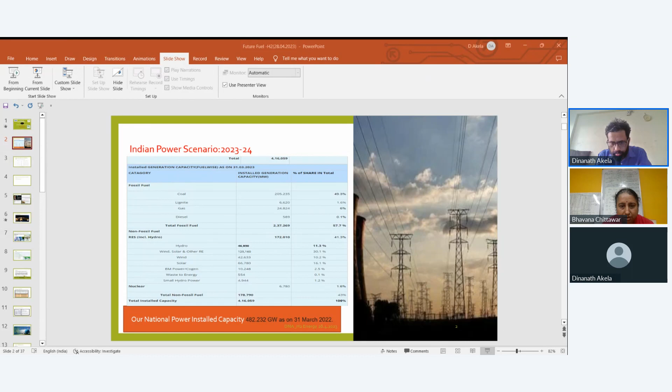Yes, Bhavna ma'am, now it is showing the energy mix opportunity. Yeah, we can see that slide. Just one and two slides, just I want to change. So the slide is changing, ma'am. No, slide is not changing. Why don't you take it in presentation mode? Okay. So I think in full screen it is not going to work. No, you can take it in presentation mode. Yeah, now we can see, yeah now the slides are changing. Okay, yeah.

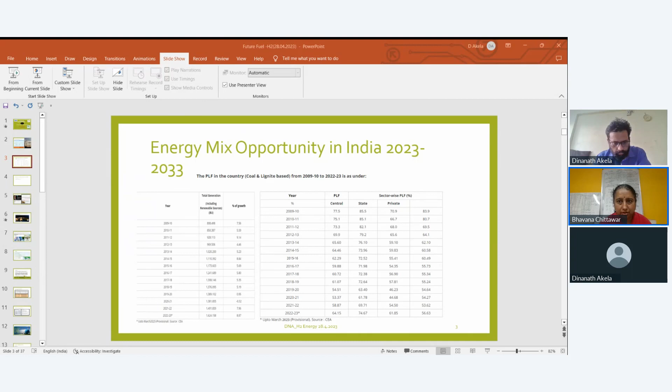The third one, why hydrogen is a lucrative solution. Is it okay, ma'am? What we can see is Indian power scenario 23-24. No ma'am. Yes, please pardon all the participants. Please confirm, now it is changing, and now we are seeing energy mix opportunity. Okay, next one is... it is not changing ma'am, no it's not changing. Okay so can I do one thing? I can now give, it is now Indian power scenario. Okay so what I will do, I'm just going to change it manually. So now it is, yeah, it is visible, yes it is visible, now it is changing, yeah it is changing. Okay, so we can manage it like this. Okay yeah okay. Yeah it is changing now.

So, all participants, right now I'm going to talk to you about the total installed capacity. Right now, as per data from the Central Electricity Authority, we have reached 416 gigawatt. From this data, you can see that coal still has 49%. But I'll give you details from just one decade before: we were in a position where 65 to 70% of generation came from thermal. Now we have come down to coal being just 49.3%. In the coming decade, I forecast that the load coming from fossil fuel will also be reduced significantly, and the other part about renewable energies like solar, wind, the green hydrogen concept, and other sources will grow.

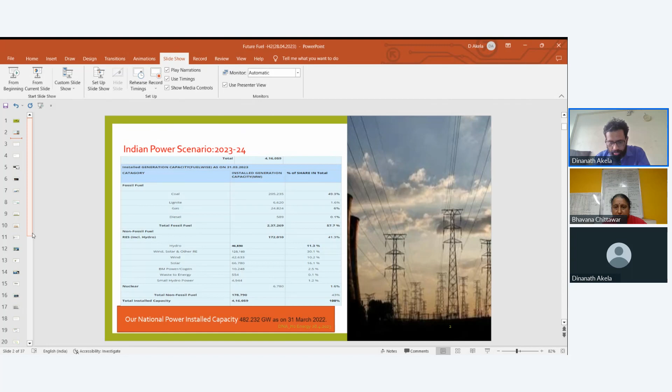So what I'm going to conclude from here is that if we are looking forward for the next decade, from 2023 to 2033, in these 10 years, right now it is the best time that renewable energies are going to lead.

This is the same situation as when I compare it to 2009, when I was in engineering college, and at that time solar had just taken birth. At that time many industries and stakeholders were talking about how it is not going to be an alternate solution to thermal, because I remember the unit cost of solar was coming to 13 rupees plus.

But now the situation, in just 10 or 12 years, is that solar is very much competitive with coal in terms of pricing. But due to some other factors, the cost of coal also goes high.

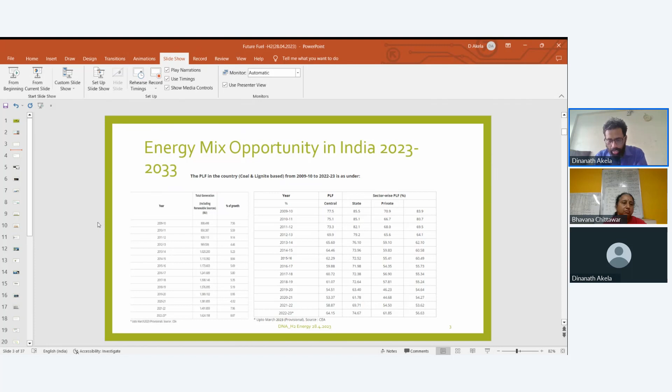In the same way, right now we are in the phase where hydrogen is just going to start its birth. This is the right time where many industries are giving more and more emphasis on R&D. They are setting up their own labs, facilitating things, investing, and coming up with great solutions.

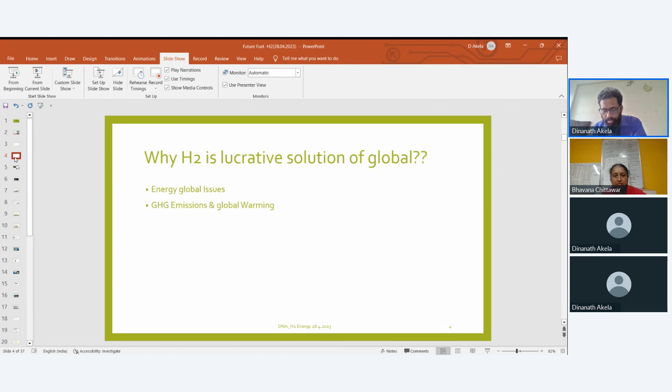So I will share one or two things in this regard. First, I would like to tell you about Reliance - their respected MD Mukesh sir has told about their target of 1-1-1. 1-1-1 means it is very interesting: the thing is about 1 kg of hydrogen would cost $1 within one decade. So he has put this target.

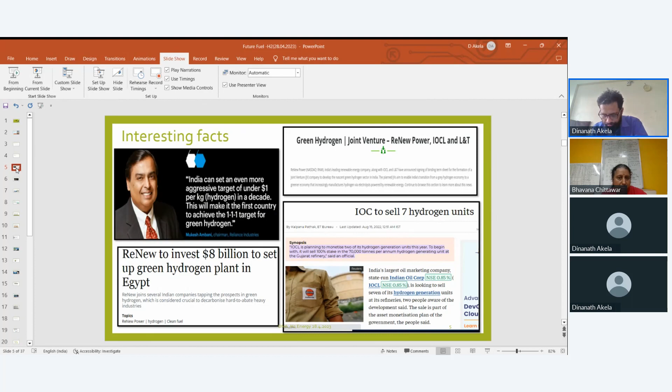Apart from that, other ventures like Renew Power, IOCL are also going to make great investments in this field of hydrogen energy. We also have an update that Germany has started some hydrogen fuel trains. So I want to share a small video showing how our country is moving in the direction of Atmanirbhar Bharat.

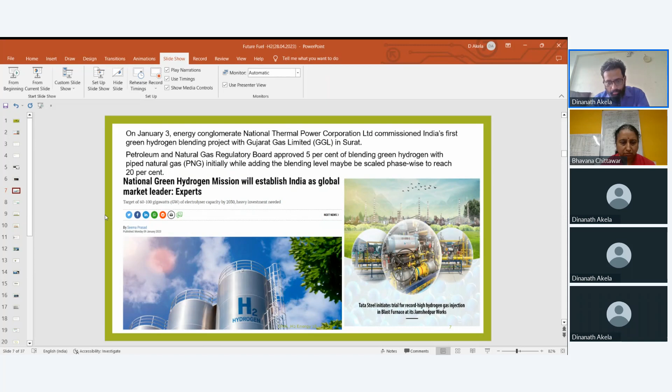Some more examples - right now Gujarat Gas Limited in Surat is doing the blending of hydrogen with natural gases. So this is the right time, and we are hoping that definitely our country will lead in this platform.

But it is not easy - there are so many challenges we have to face right now, like technology development. From now onwards I'm going to share how this firing technology is going to be built up, as we talk about the system of the furnace and the system of the boiler. So I will explain each thing in detail.

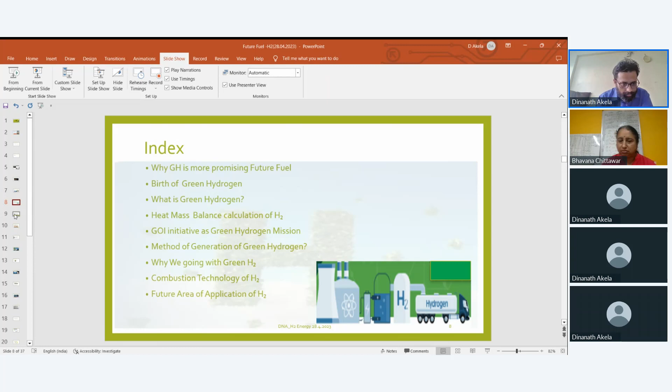First, I will give you the characteristics of these hydrogens. It has a huge GCV value, like 28,922 kilocalories per kg. If we compare with natural gases, we clearly get more than 2.5 times.

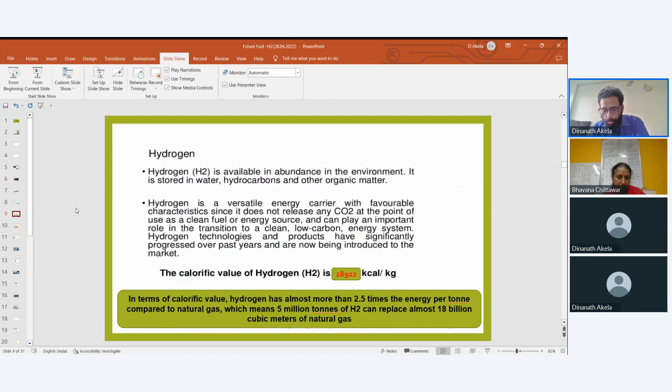Apart from that, let me show you another factor: if we burn 1 kg of carbon, it gives a heat value of 8,084 kilocalories. In the same way, if I burn hydrogen, it gives almost more than 2.5 times that value. So this is the comparison based on heat value.

If we see the other opportunity that hydrogen gives, the first and foremost is about emission. This is a very alarming time for us, because right now we are in a situation where we can say we are all sitting on a fireball. So this is the best time to think not only about development, but how we can save our earth for the future. This hydrogen fuel has the potential to solve both issues.

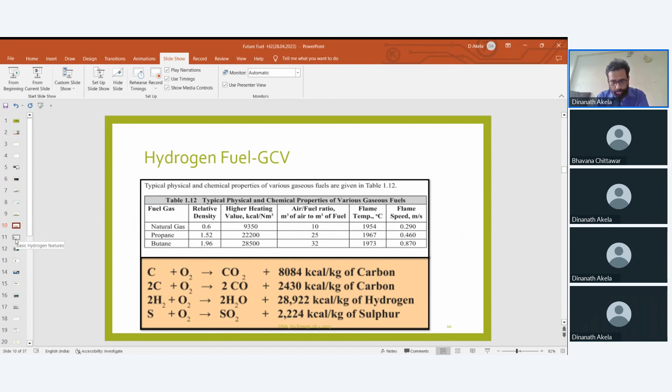Let me give you more detail about hydrogen's features. It needs to be stored at very high pressure. This is one challenge for us.

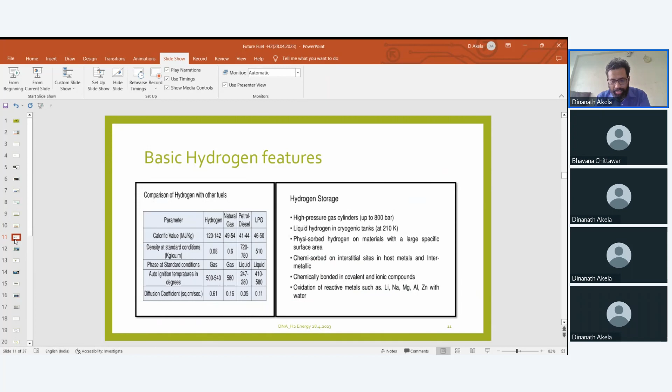The reactivity is very fast, and it oxidizes with metals like lithium, sodium, magnesium, aluminum, zinc, and water. According to that, we have to design the storage system so that we can transport it. Due to this reason, right now we are not in a position to transfer it in bulk. That's why right now we are doing it in small buckets.

Why does hydrogen have such a promising future as a fuel? This is what we can say is the solution for both energy and environmental issues.

According to the types of hydrogen, there is green, gray, blue, pink, and white. Depending upon the generation method, these all come about.

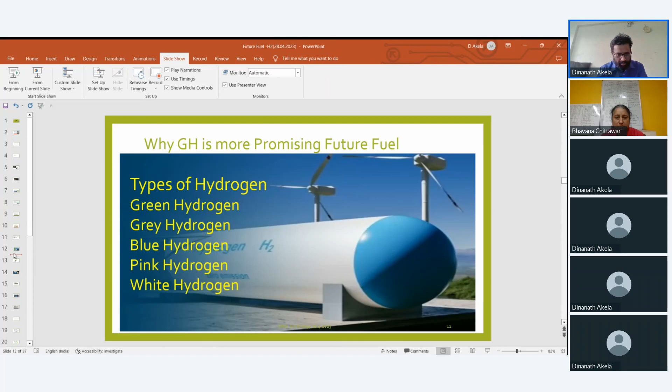If we talk about green hydrogen, we generate it through renewable energies or renewable electricity. Now let me show you how the methods of hydrogen gas generation come about.

The first method is steam methane reforming. After that, partial oxidation, autothermal reforming, methanol reforming, pyrolysis, oxidation, reduction of biomass, and the electrolysis method for water.

This is the best method, and across the globe a lot of research and work is going on. After that, we also have fermentation of organic material and thermochemical splitting of water.

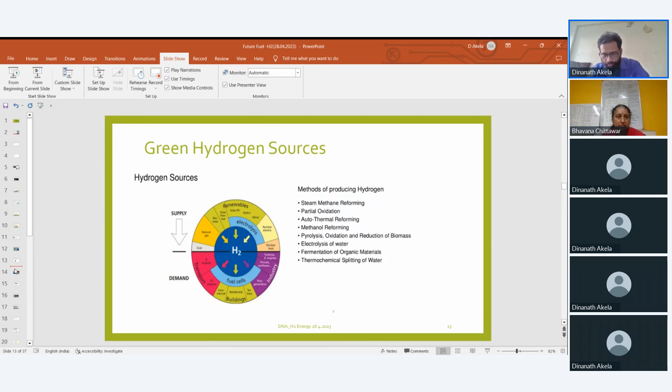This is the process called the electrolysis method. But the process and challenge of getting this hydrogen gas is very tough, and the production rate of hydrogen is still on the lower side.

Right now more and more development is going on regarding what type of catalyst we can use. Research is also going on into using cadmium or other materials for electrodes, so that generation of hydrogen becomes easier, safer, and faster. This is what we can see in the phase of the prototype.

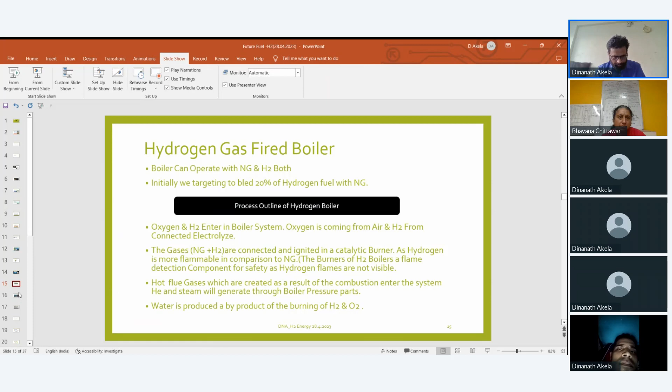So here I'll share with you one boiler that fires this hydrogen. This is the train or scheme of firing hydrogen in the boiler. This hydrogen is very sensitive - when there's a leakage, there are chances of explosion. So we have a high quality detection system that I'll explain in the next few slides. This is the pathway and scheme where, with the help of good accuracy instruments, we can fire hydrogen in the burners of the boiler.

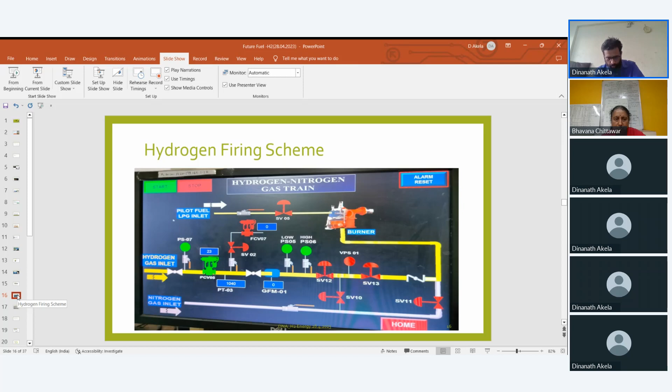And if it is not firing or in idle time, we also have a purging system, and this purging is done through nitrogen. By this method, up to now, we can achieve in practical terms 20 to 25% by volume, or in normal meter cube, 300 to 400 normal meter cube per hour, with a pressure of 21 to 25 mmWC. Here I have mentioned the SOPs of hydrogen firing in the boiler up to 40%, but we have achieved 20-25%.

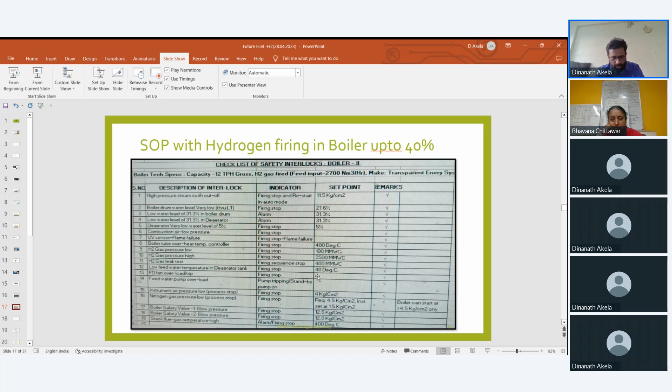So you can see here the hydrogen gas pressures - we have safety limits and safety alarms for safer operation and reliable use of hydrogen in the boiler. High pressure tripping will occur at 2500 mm of WC. On the lower side it is 100, and the gas leak alarm will generate at 400 mm of WC. With these facilities we are moving forward.

Now what are the challenges of hydrogen firing? As we look at the design, the first challenge we are facing is that hydrogen has a laminar flame speed which is different compared to other hydrocarbons, as I already explained. This means that compared to other hydrocarbons, per unit volume or per unit area, the heat released is much higher in hydrogen.

The point is that if we fire with hydrogen, we get a high adiabatic temperature, more than 1100 degrees Celsius. Above 1050 or 1100 degrees C, NOx generation starts increasing. What we have observed is that as we fire with hydrogen, the NOx generation is approximately 3 times as compared to hydrocarbon. That's also a challenge, because as per CPCB norms or state pollution control board norms, we have to limit our NOx at the level of 50. So that is the real challenge when firing hydrogen in a boiler.

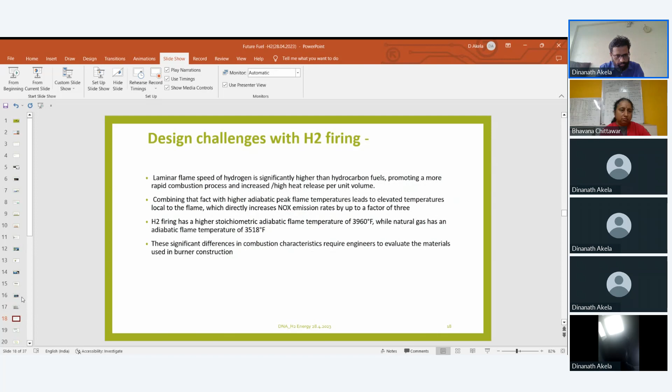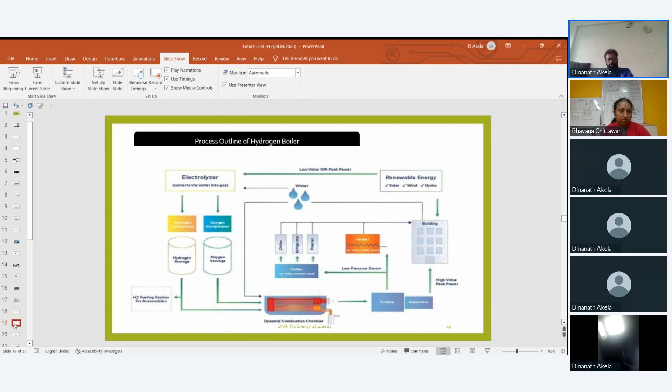Now I have shown one process outline for the hydrogen boiler. We get hydrogen through the electrolyzer, and after that we put it in the combustion chamber. Then it undergoes the process of combustion, heat is generated, and this heat is utilized for steam generation. So this is the basic scheme I have drawn for that.

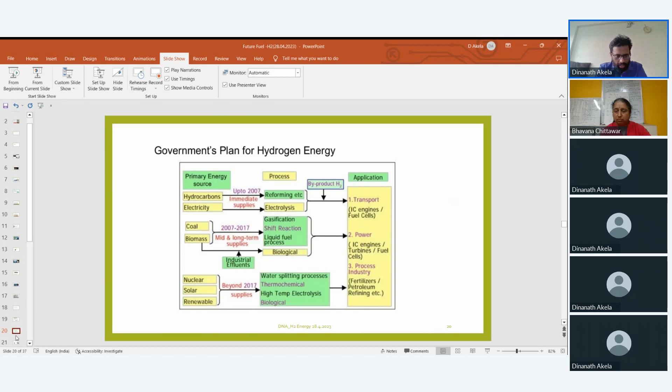Now the government is also giving much more emphasis, and they have started the Green Hydrogen Mission. I will tell you about that initiative, but before that, let me point out the safety concerns and the safety interlock devices which help detect even 0.001% of hydrogen leakage.

This is used in the boiler or furnace area. I have mentioned these two instruments that have the highest accuracy for leak detection: TDL systems and flame scanners with ultraviolet or infrared detection. However, these are no more suitable, because instruments working on UV and IR have some limitations.

So if we want to detect hydrogen, we have to move a little towards other sensing devices that give accurate and fast results. According to that, we can prepare our SOP to stop the firing, and based on the results, we have to purge and clean the system.

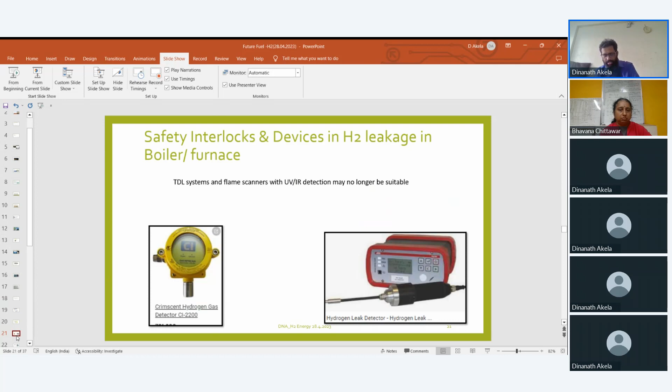Other challenges include how we are going to modulate the firing of hydrogen in the boiler.

Another challenge is associated with green hydrogen itself - the formation through electrolysis or steam reforming. These two main processes of hydrogen extraction are extremely expensive right now. In a few slides, I will talk about the current costing, because you definitely have this question in mind about the cost of production per kg of hydrogen. I will share that with you.

Apart from that, storage is a big challenge, because you have to store it at very high pressure. Compared to gas, hydrogen leaks are hard to smell, which makes leakage detection almost impossible. That's why we have to use very high accuracy equipment, so when leakages occur, we can easily trace them out and check it.

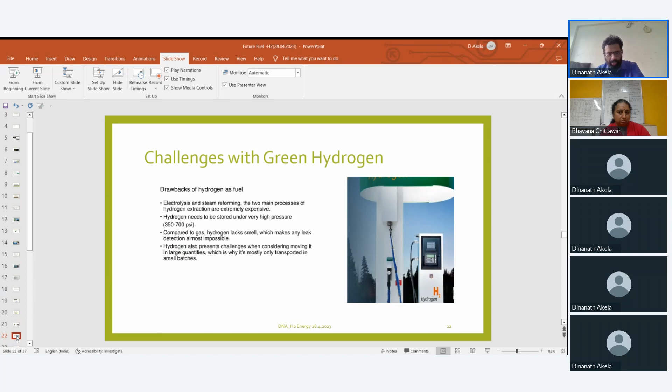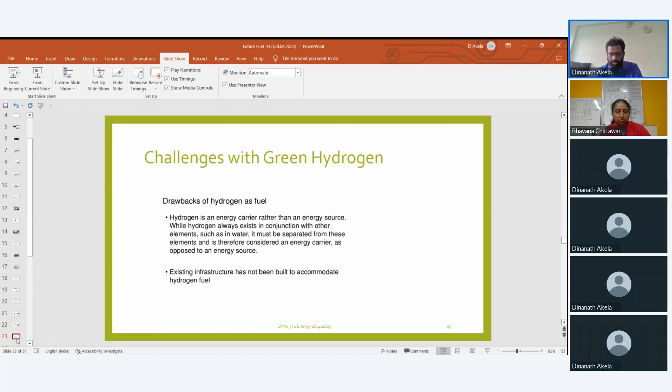Isolate it. Hydrogen also presents a challenge when considering moving it in large quantities, as I told you. That's why right now we are doing transport in small batches. As a drawback of hydrogen as a fuel, the main important thing is about the existence of infrastructure - it is also required to deal with that.

So in this way, if you look at production - talking about green hydrogen production - we generate electricity through renewable energy systems. After that, we do electrolysis and generate hydrogen. Next, if we have a CO2 capture system, with application of this hydrogen we form synthesis fuels. If we mix it with N2, this generates ammonia, which is called green ammonia.

And transportation happens by shipping, trucks, or pipelines. Almost all industries are users, using it in their specific way - some use it directly as a raw product, and for others it serves as a source of energy.

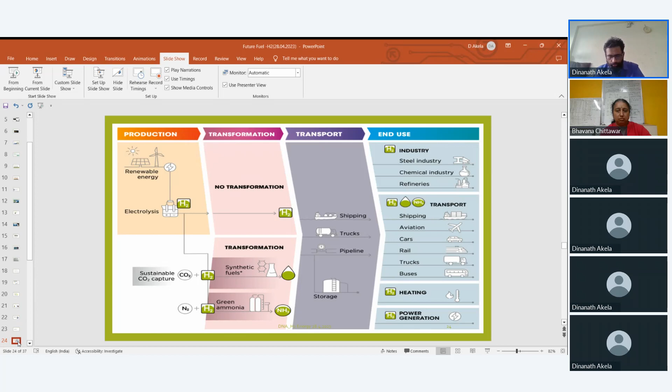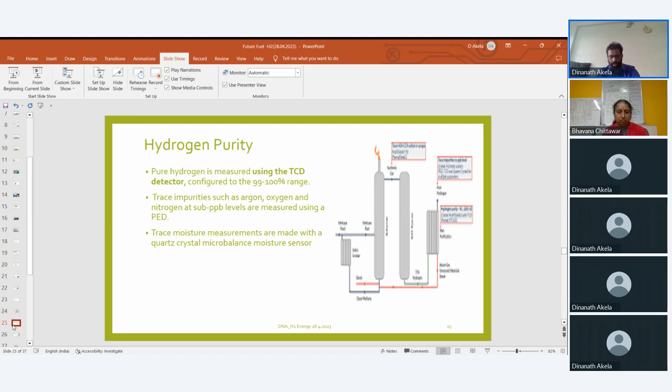Now this is the important thing about the purity of the hydrogen. Suppose there is a minor, even 0.01%, leak or impurity or moisture present—the chances of an explosion may increase. That's why we regularly have to take samples, regularly monitor the system, and place dedicated monitoring systems in the closed system, so that any radiation or leakages can easily be traced and made safe.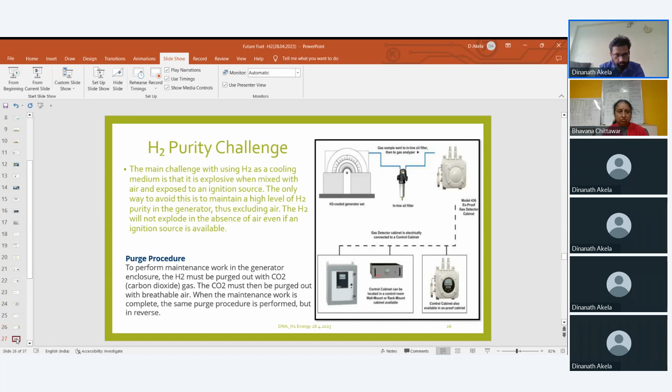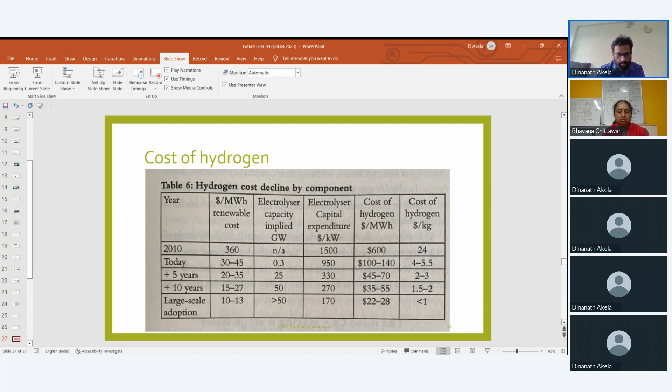Right now we have the cost at a lump sum of 4 to 5.5 dollars per kg, which we have to target reducing over the next decade, on a larger scale, down to 1.5 to 2 dollars. So this is the current cost of production of hydrogen.

The government of India also has great missions to promote and sustain development in the field of green hydrogen, so they have published and maintained a policy for that. This policy is going to create favorable conditions to promote its use and development, and to make India an energy hub in the green hydrogen field.

A few clauses I want to discuss: manufacturing of green hydrogen or ammonia, the renewable energy plant shall be given grid connectivity on a priority basis to avoid any procedural delays—that provision has been made. Apart from that, there is relaxation in taxation and benefits related to Renewable Purchase Obligation (RPO), which will grant incentive to hydrogen and green hydrogen manufacturers and distribution licensee for consumption of green power. These are some of the detailed steps and pathways mentioned by the government of India to promote this green hydrogen mission.

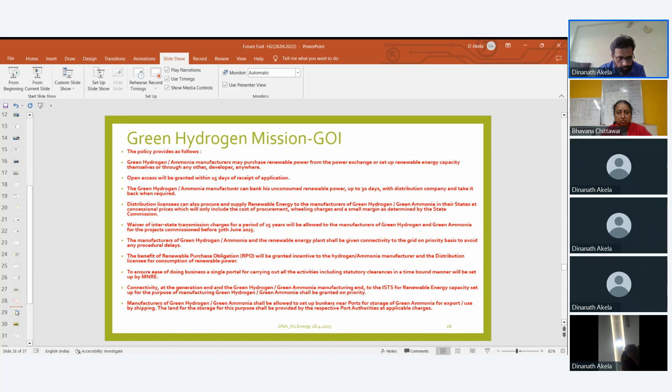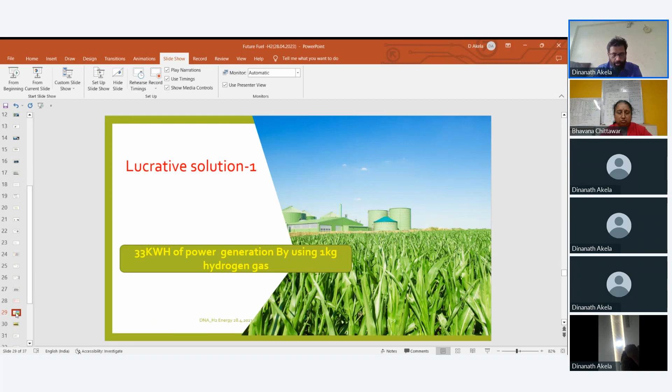Now this is one important thing—very important—about the lucrative solutions when using green hydrogen or hydrogen gas. Simply put, if we use 1 kg of green hydrogen or hydrogen gas, we are able to generate 33 kilowatt hours, or in simple terms, 1 kg of hydrogen gas can generate 33 units. So this is one important benefit and opportunity of using hydrogen gas.

The second point, as I started with the theme of this webinar, is about energy security or energy mix. Energy security is going to be provided through steps of more and more use of hydrogen energy, so that the load on thermal and other sources is diminished.

R by P, that is Reserve versus Production, for coal is estimated to be available for the next 35 to 40 years. That's why I am emphasizing that we are at the edge of the corner—we have to take the initiative and move fast, not only in the use of electricity or generation, but also for our future. So it is also going to provide energy security for Atmanirbhar Bharat.

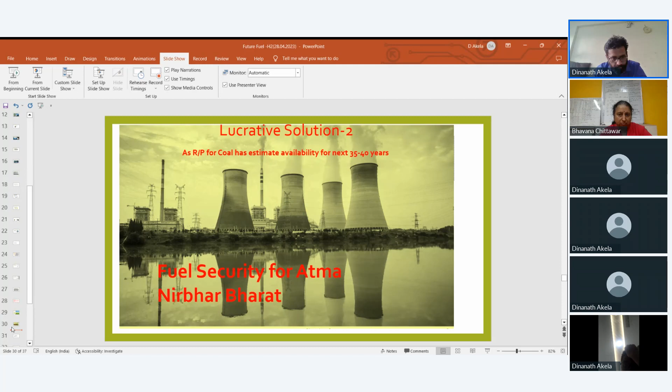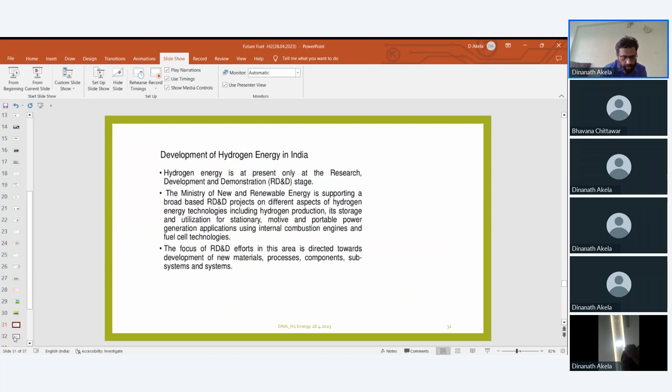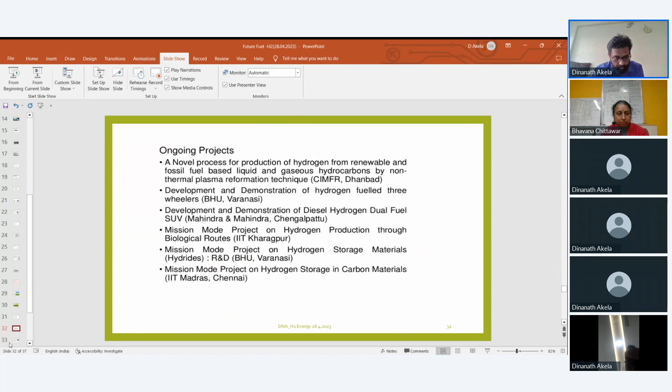So now we reach the conclusion that hydrogen storage is still the major issue of concern. Lots of work is still in process. Development, usage, and reliability are all still in the pipeline. So we hope that in the coming time we will get the latest development of usage of hydrogen.

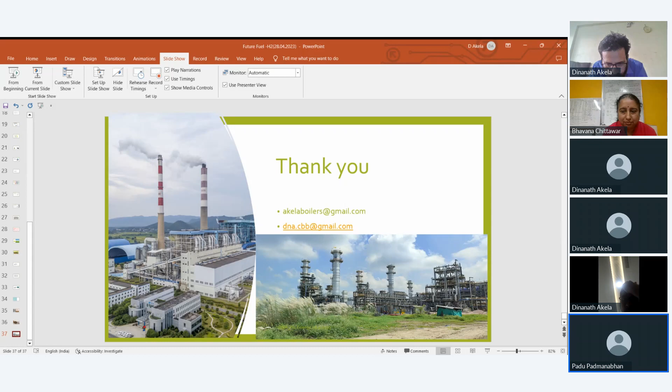Apart from safety, the question really was: in an existing coal-fired industrial water tube boiler, if one were to change from coal to hydrogen, the heat transfer rates are very different. Hydrogen has a much higher transfer rate, and is more luminous, so radiation heat transfer would be high. The adiabatic temperature is also much higher, so radiation heat transfer would be facilitated that way. The internals of the boiler would change considerably in terms of superheat area, convection area, and so on. Also, since hydrogen results only in water vapor, corrosion rates would be different, and metallurgy would be different. So the economics of doing so would be much different and difficult to justify. I wanted to get a sense of whether a coal-fired industrial or utility boiler can be economically changed to hydrogen. What is your thinking about that?